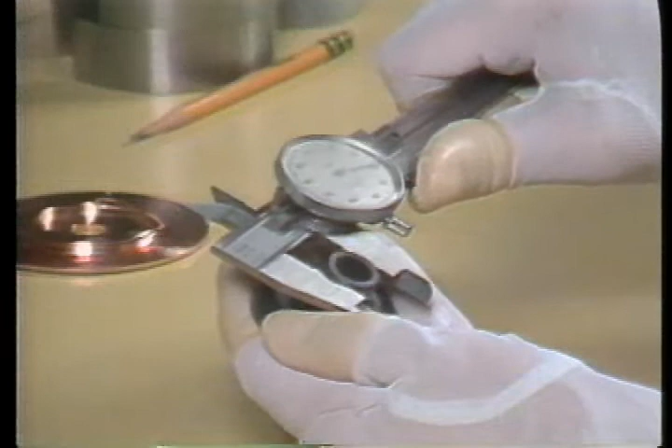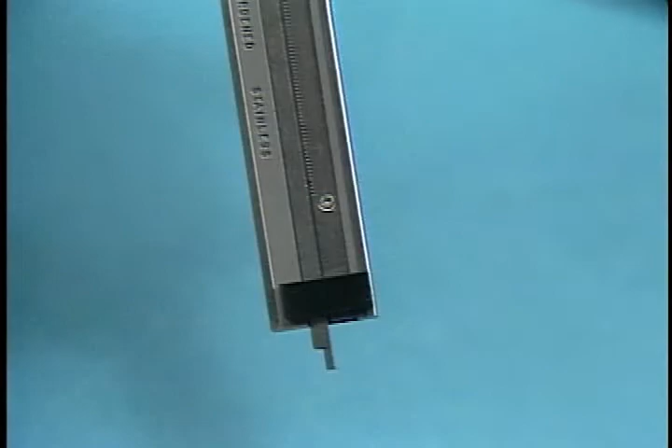Today we're going to see how standard mechanical calipers are used. The caliper is one of the most common all-round measuring tools. Because calipers often have several measuring surfaces, they can measure inside, outside, and depth dimensions with an accuracy down to 1/1000th of an inch. Although calipers come in different sizes, there are two basic types which are most commonly used.

One is the vernier caliper, which has a main scale and a vernier scale. The caliper in more common use is the dial type. Measurement readings are taken from a main scale on the beam and from a dial face.

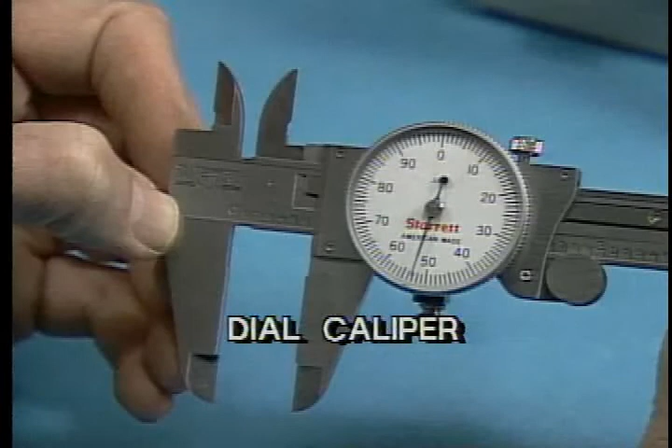Standard calipers consist of a beam or bar with graduated scales on which these jaws move. The inside measurement jaws are here, with their flat measuring surfaces facing out, used for making inside measurements. The outside measurement jaws with the flat measuring surfaces facing in are here. Note that each set of jaws has one fixed jaw and one adjustable or movable jaw.

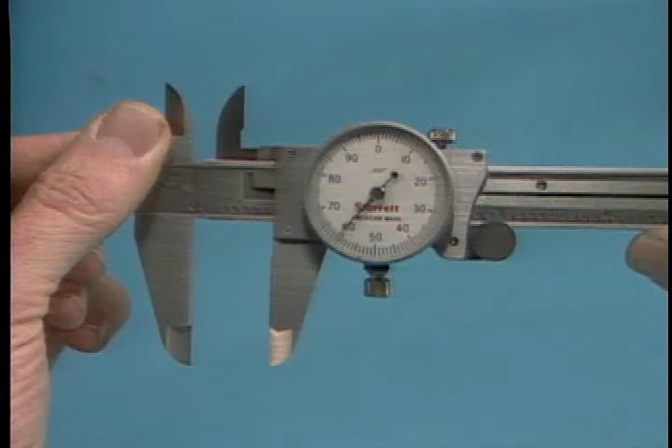The movable jaws are connected to the slider. Either a thumb clamp or a wheel is commonly used to move the slider and adjust the jaws to the proper measurement position.

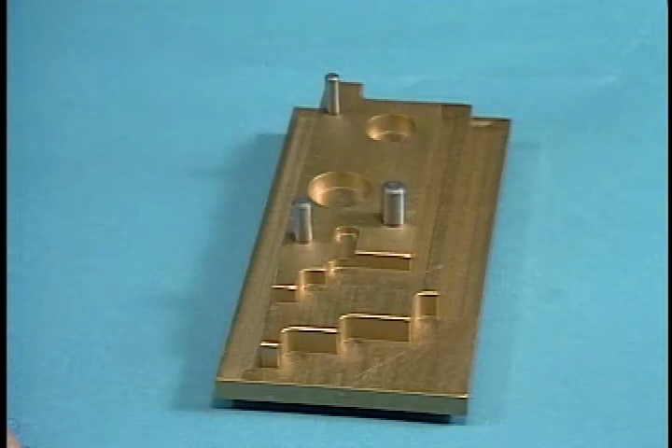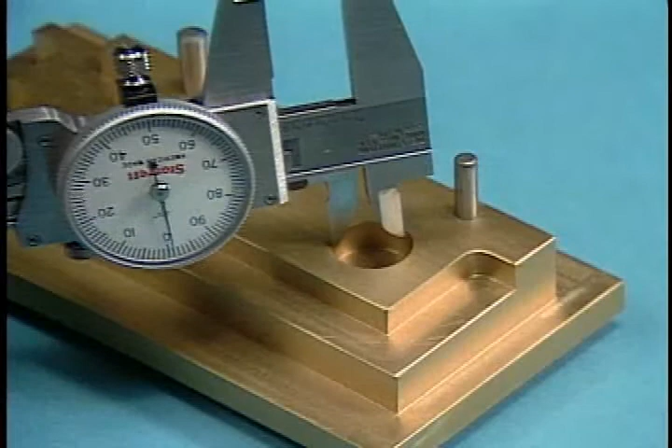To measure an OD, or a thickness, you would open the outside jaws of the caliper to a distance slightly wider than the dimension to be measured. To measure an ID, you open the inside jaws slightly less than the diameter. In either case, the caliper's jaws are then moved against the dimension, arcing from left to right. This aligns or squares the jaws with the surface.

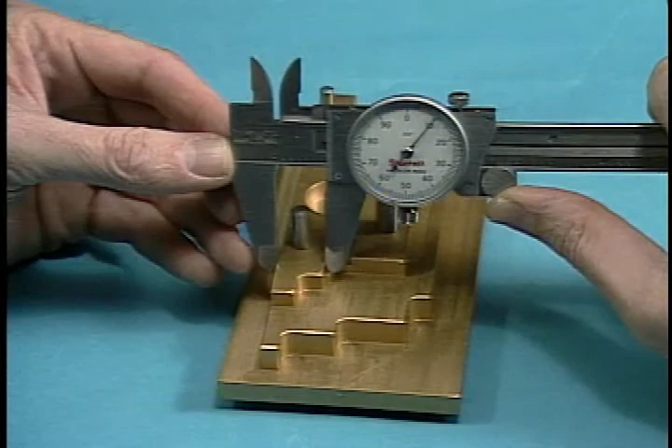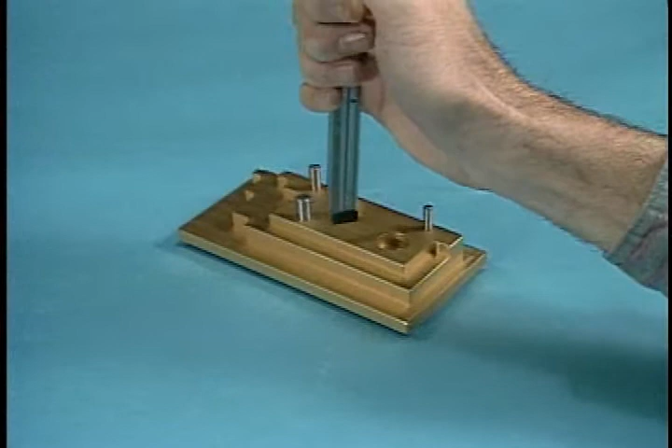Finally, the caliper's jaws are adjusted tightly enough so that they create a slight drag against the surface to be measured. When the jaws move, the depth blade also moves. When the edge of the beam is held this way, at an edge or a hole, steps or depth can be measured by using the depth blade.

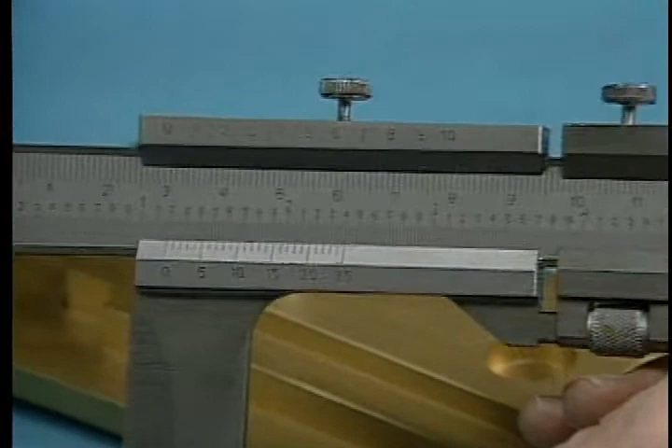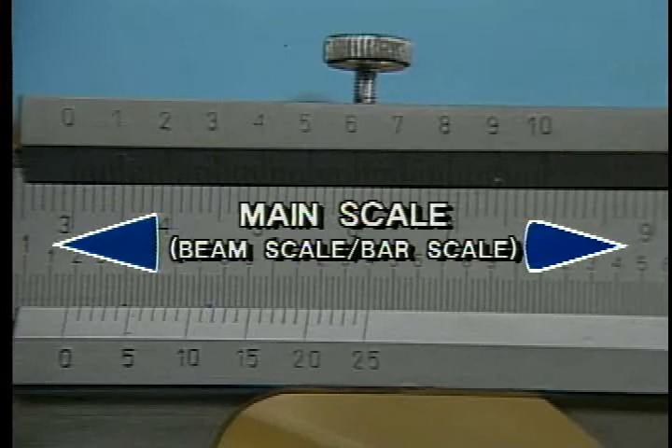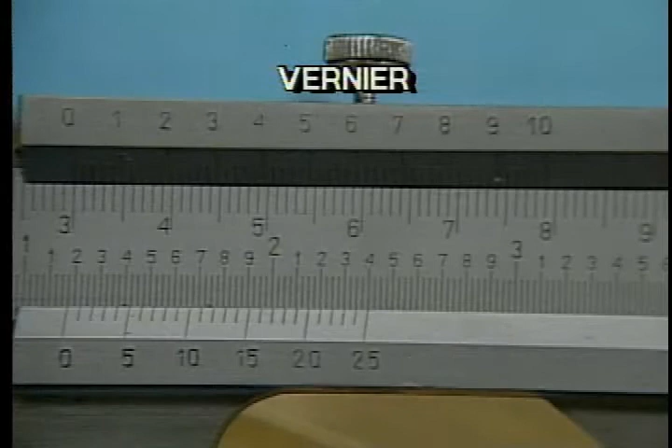Like other measuring tools, calipers are available in decimal inch and metric scales. Let's first examine the vernier caliper to see how its scales are used to take measurements. All calipers have at least one main scale on the beam, often called the beam scale or the bar scale. This caliper has two main scales because it is designed for taking measurements in decimal inches and in millimeters. And there are two vernier scales on the slider, one for decimal readings and the other for metric readings.

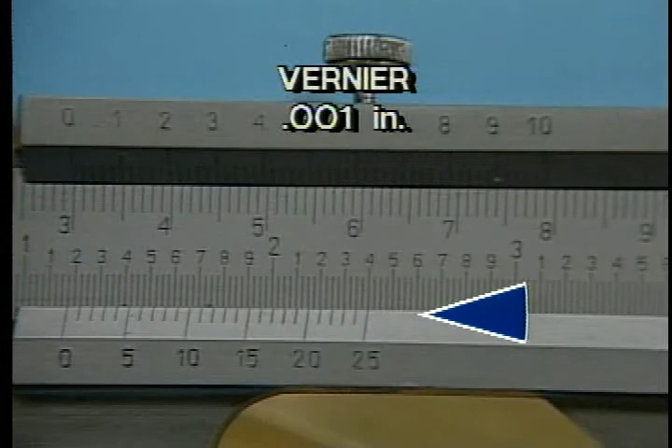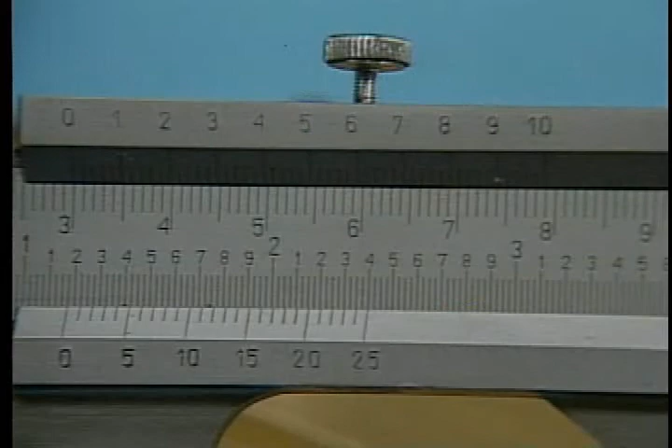We will concentrate on the decimal vernier. The decimal vernier allows precision readings to 1/1000th of an inch. It operates in similar fashion to the vernier on the outside vernier micrometer we looked at in Lesson 2. However, this vernier is laid out flat, parallel to the caliper beam.

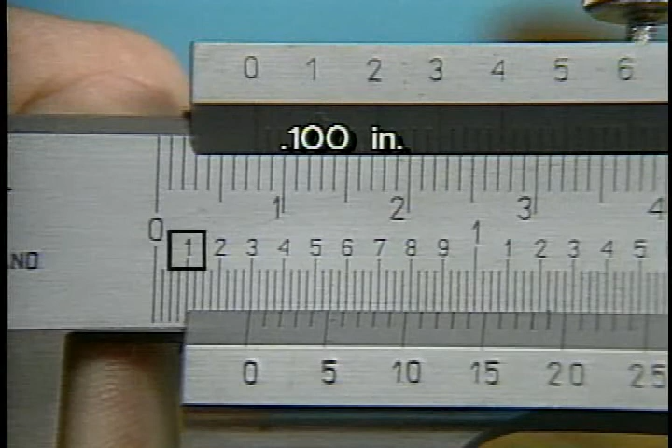Each division of this decimal inch main scale represents 25/1000ths of an inch. Each fourth line marked by a number indicates 100 thousandths. Here, the longer lines and larger numbers indicate inches. The line indicated as 1 represents 100 thousandths. The line indicated as 2 represents 200 thousandths, until we get to 1 inch, 2 inches, 3 inches, and so on.

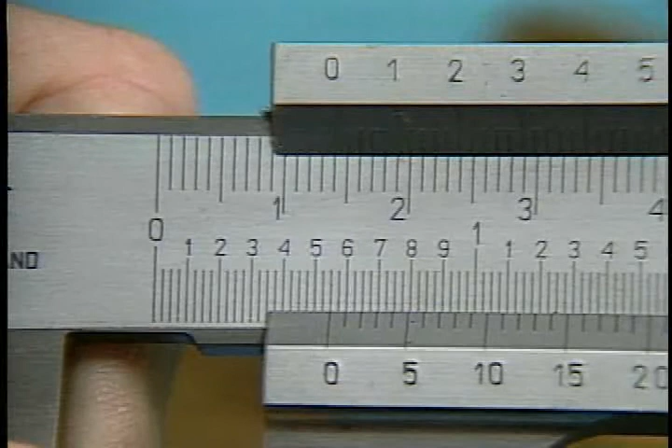This point on the main scale is 300 thousandths. And here the reference line is two short graduations beyond 500 thousandths, which indicates 550 thousandths. Remember, each smaller line equals 25 thousandths, so two lines beyond the number means an additional 50 thousandths. This point on the scale indicates 2 inches and 175 thousandths.

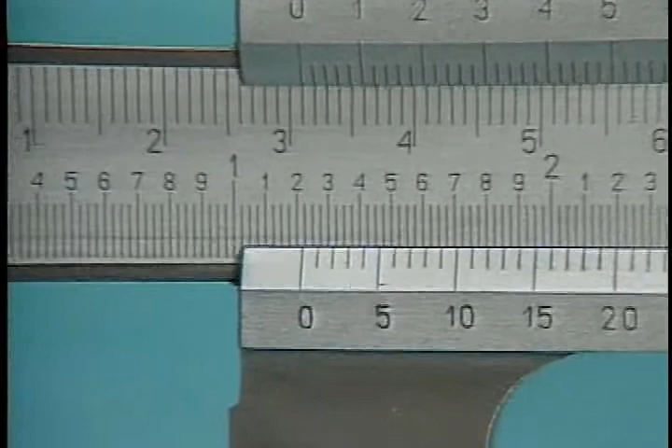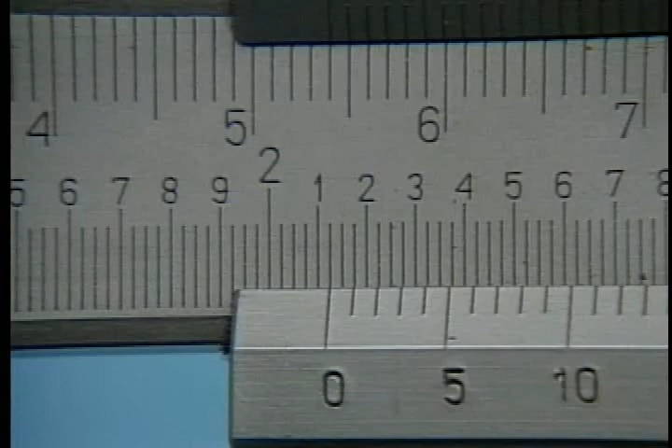First, determine the number of inches the vernier 0 mark has passed. In this case, it has passed the 2-inch mark. Next, note the 100 thousandths graduations that the vernier 0 has passed. Here we can see it has passed the 100 thousandths mark. Then determine the number of small divisions past the 100 thousandths mark the vernier 0 indicates.

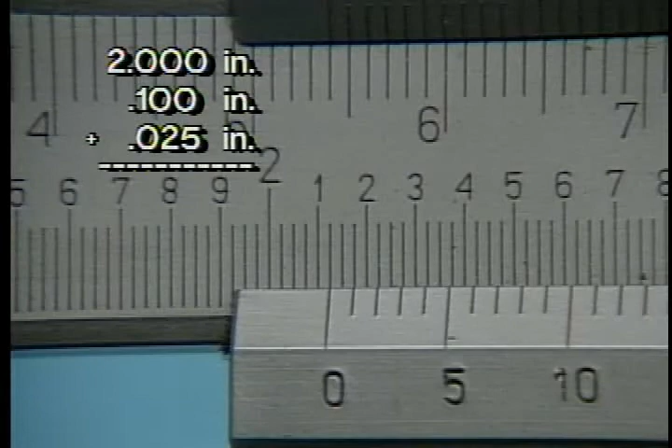Here, the vernier 0 is lined up exactly with the first line past the 100 thousandths mark, indicating 25 thousandths. Because the vernier 0 lines up exactly on a scale line, we can take a reading by adding only the 3 main scale graduations. In this case, it is 2 inches plus 100 thousandths plus 25 thousandths, which total 2 inches and 125 thousandths. Here is a measurement on the vernier caliper.

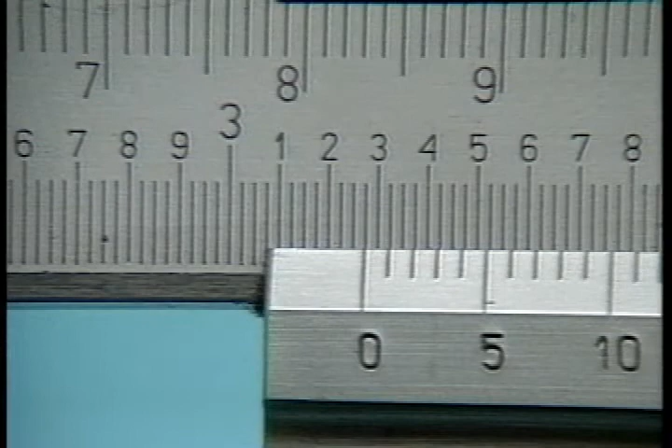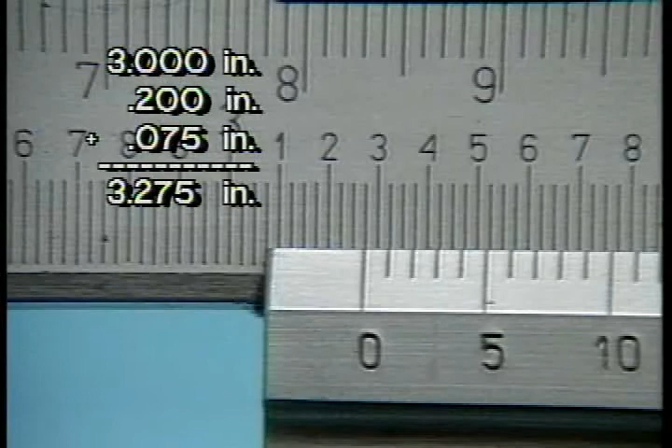Can you tell what reading is indicated? Be sure to notice that the 0 mark of the vernier scale has passed the 3-inch mark. It has also passed the 200 thousandths graduation. Finally, the 0 reference line corresponds to the 3rd graduation past the 200 thousandths division, indicating 75 thousandths. And so 3 inches plus 200 thousandths plus 75 thousandths equals 3 inches and 275 thousandths.

For measurements accurate to a thousandth of an inch, the vernier scale is used. Again, the vernier on the caliper is similar to the one found on micrometers. But remember, the vernier on the micrometer is capable of indicating measurements to tenths of a thousandth, while the vernier caliper indicates measurements to only 1/1000th of an inch.

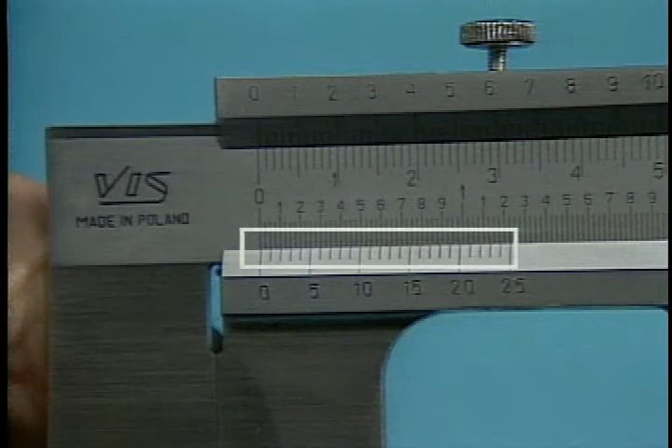The vernier on the caliper is an enlargement of the 25 thousandths markings between minor divisions on the main scale. When the 0 reference on the vernier scale does not line up exactly with a mark on the main scale, then a reading of the vernier is required.

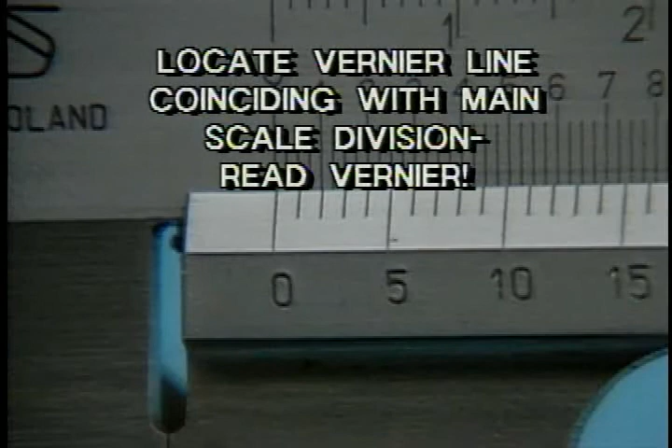To read the vernier scale on the caliper, locate the first graduation of the vernier after the 0, which coincides precisely with one of the divisions on the main scale. Then you read the number from the graduations on the vernier.

For example, here the first graduation on the vernier, which lines up exactly with the division on the main scale, is 5. This is a reading of 5 thousandths. Naturally, it takes a little practice to see where the graduations line up precisely because the lines are small.

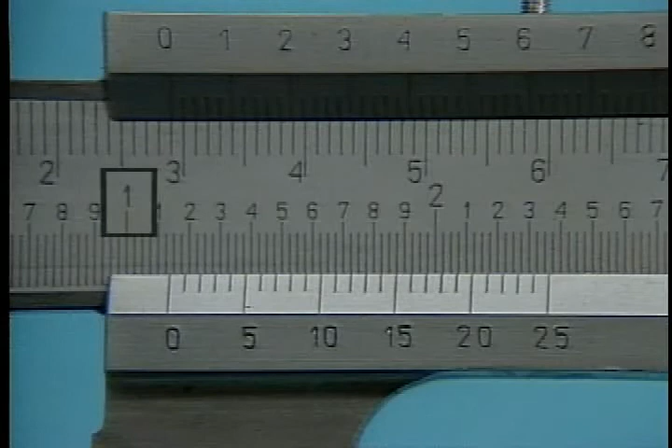Now let's review how to take a measurement down to 1/1000th of an inch. First, you determine the number of inches the vernier 0 has passed. In this case, it has passed 1 inch.

Next, determine which 100 thousandths the reference 0 has passed. Here it has passed the 100 thousandths mark. It has also passed the first 25 thousandths graduation.

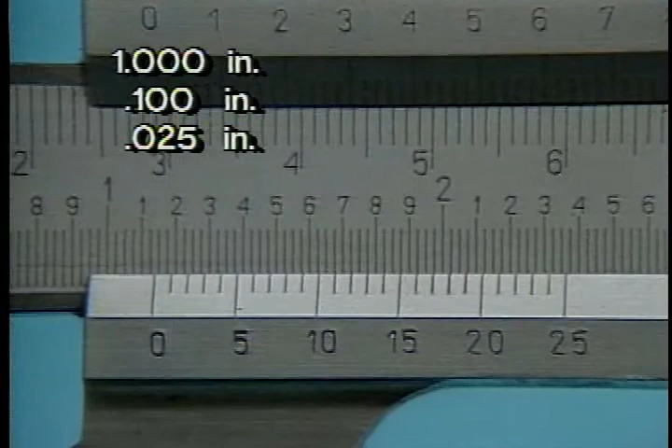But because the vernier reference 0 has not exactly lined up on a 25 thousandths line, we must read the vernier scale. The first graduation on the vernier scale, which coincides with a line on the main scale, is here, 13 thousandths.

Finally, we add up the results: 1 inch plus 100 thousandths plus 25 thousandths plus 13 thousandths. This gives a total measurement of 1 inch and 138 thousandths.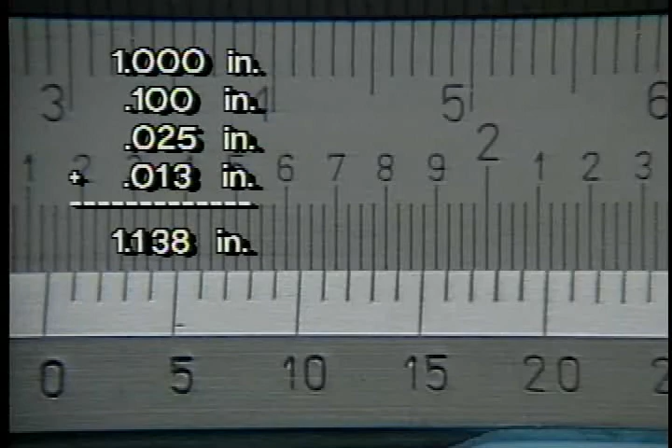The dial caliper operates in a similar manner to the vernier caliper, but its design allows for easier and quicker readings. Measurements are obtained by taking the combined readings of the main scale and the dial.

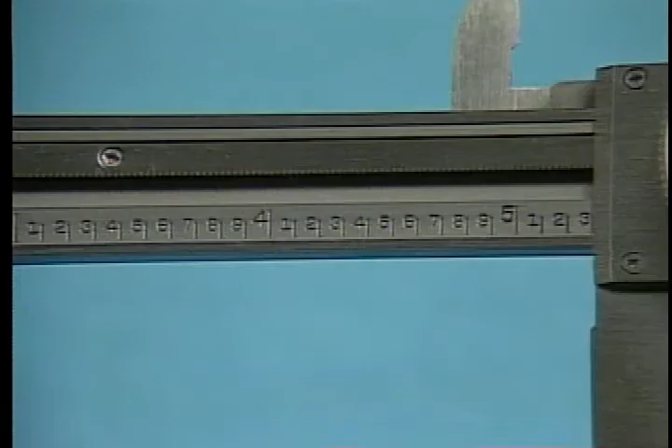To hold the measurements, this caliper has a lock nut on the top of the slider. The markings on the main scale are much simpler than on the vernier caliper's main scale. Each large number indicates inches, while the smaller numbers on the minor divisions indicate hundred thousandths.

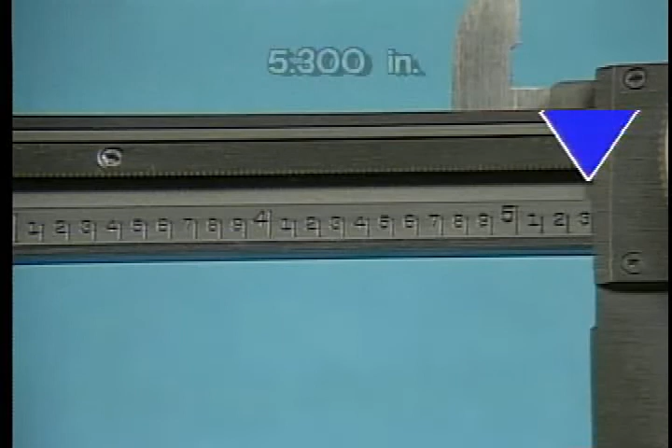For example, this point on the main scale represents 5 inches and 300 thousandths. The dial is calibrated so that each complete revolution of the pointer represents 100 thousandths of an inch.

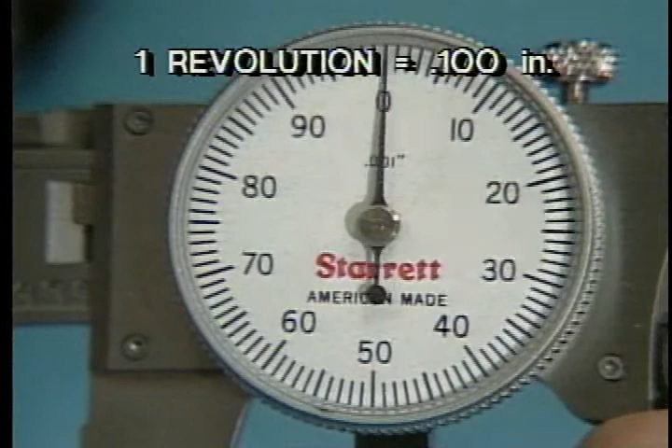Every 10 thousandths is numbered: 10 thousandths, 20 thousandths, 30 thousandths, and so on. Each division between 10 thousandths marks represents 1 thousandth, with the slightly longer line indicating 5 thousandths. If the pointer indicates a reading between graduations, it is usually rounded off to the nearest thousandth.

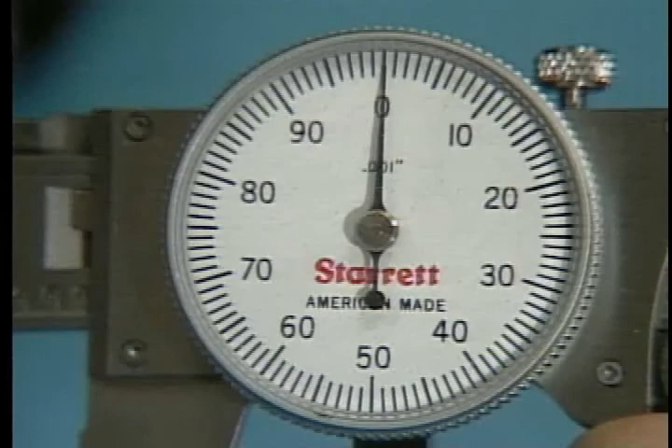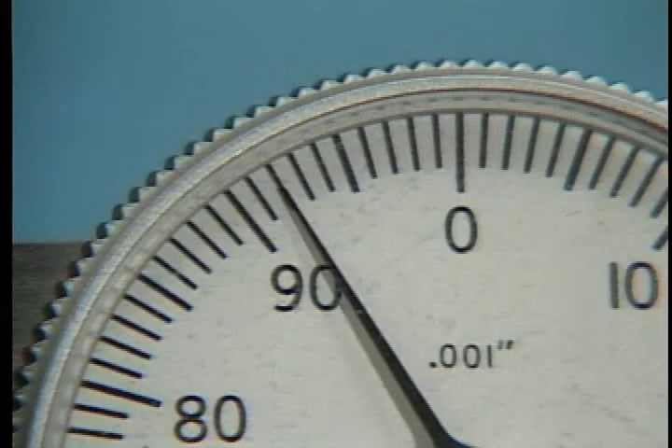Here, the pointer indicates 3 divisions past the 20 thousandths mark, or 23 thousandths. Here, the pointer indicates a reading at the 2nd division after the 90 thousandths mark, which reads as 92 thousandths.

In order to take a total reading with the dial caliper, the indication on the main scale is read, then the reading on the dial display is read and added to it.

First, the caliper jaws are positioned against the object being measured, and either the thumb clamp is released or a lock nut is tightened to hold the measurement.

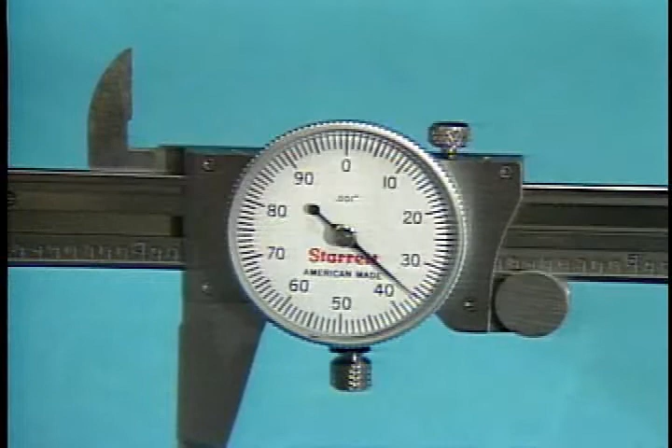Next, we determine the point on the main scale that the edge of the slider indicates. Note that the dial caliper is different from the vernier caliper, which utilizes the 0 point on the vernier scale as its reference. On the dial caliper, the beveled edge of the slider is the reference line.

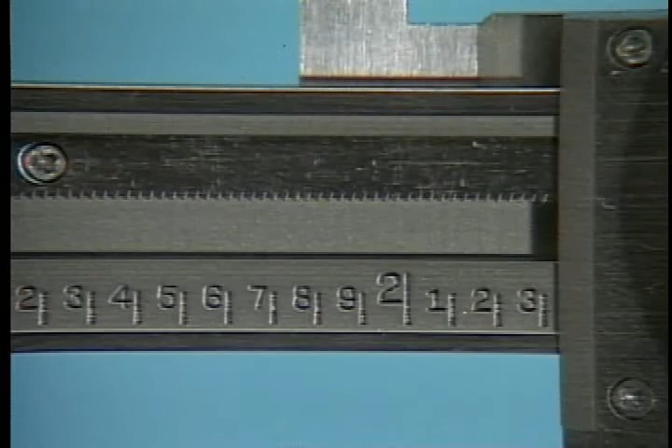We note the number of inches the edge of the slider has passed. In this case, it has passed the 2-inch mark. Then we note how many hundred thousandths beyond the 2-inch mark the edge of the slider has passed. Here, the edge is slightly past the 300 thousandths mark.

Next, we determine the number of thousandths on the dial indicator. The dial indicator is pointing at 6 divisions past the 30 thousandths mark, or 36 thousandths.

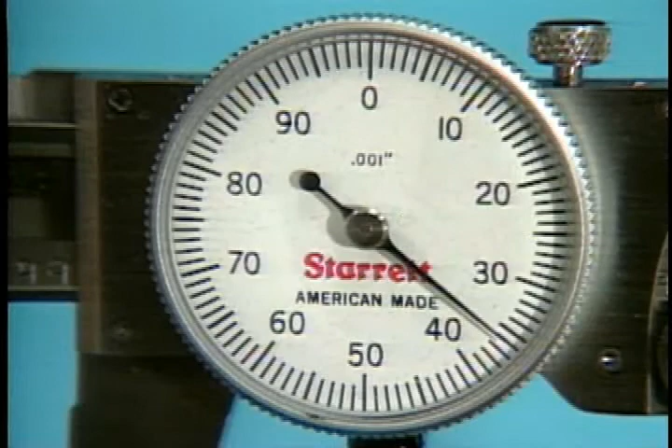Finally, we add up all the values we have obtained: 2 inches plus 300 thousandths from the main scale plus 36 thousandths from the dial indicator equals 2 inches and 336 thousandths.

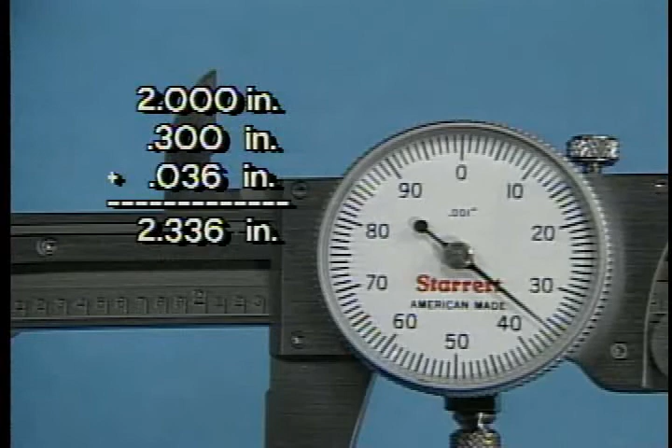Here is another measurement on the dial caliper. What is the total reading indicated? As you can see, the edge of the slider is past the 1-inch mark and the 300 thousandths division.

The pointer on the dial indicates 1 division past the 70 thousandths mark. 1 inch plus 300 thousandths plus 71 thousandths equals 1 inch and 371 thousandths.

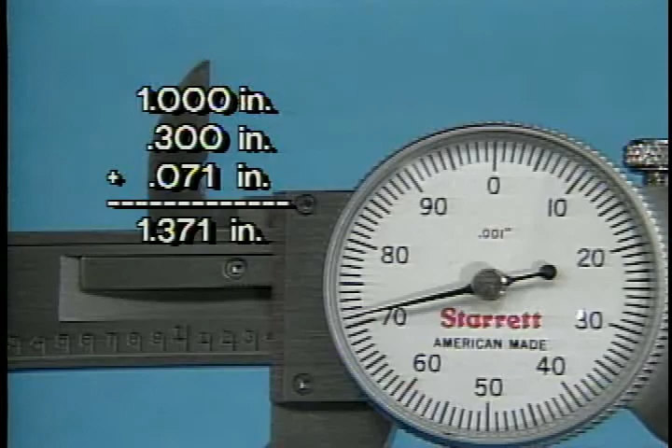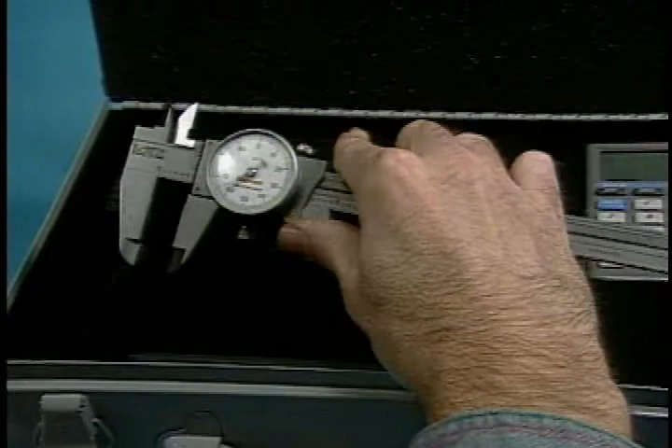Before using a caliper, make sure that the measuring surfaces of the jaws are free of dust and dirt. Use a soft cloth to clean them if necessary. Next, check to see that the device is calibrated before you use it.

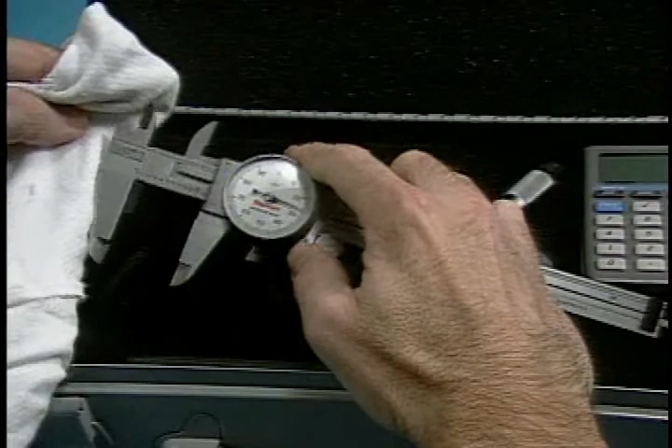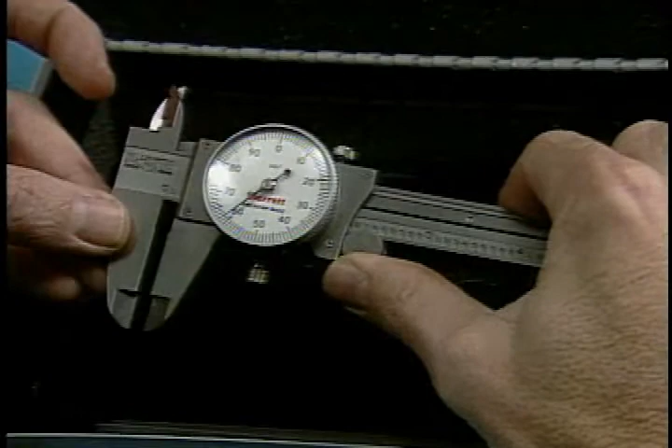With a dial caliper, like the one in the Precision Measurements Kit, close the jaws fully. Then, check the indicator on the dial. It should be exactly at the 0 mark. If it is, then the caliper is calibrated and will take measurements accurately.

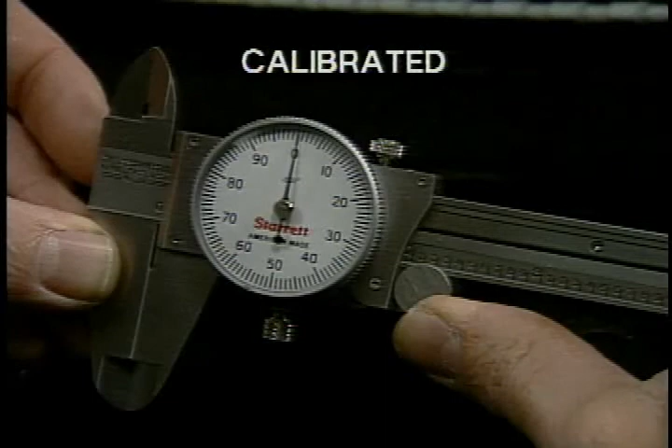If the indicator is not on the 0 mark, then the device is not calibrated. Call on your instructor for assistance.

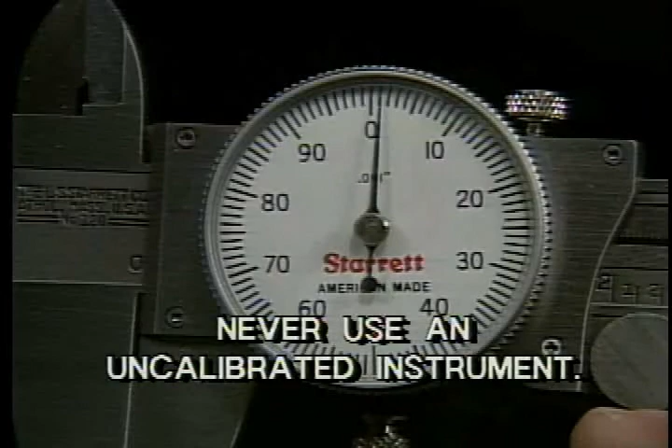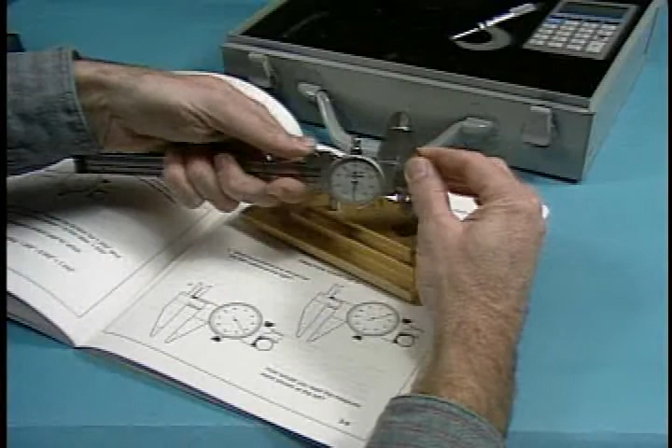Read the material and do the practice exercises in your study guide. Then take a little time to make sure you understand everything we've covered in the first 3 lessons. In Lesson 4, we're going to apply what we've learned with some intensive hands-on practice using the devices from the Precision Measurements Kit.